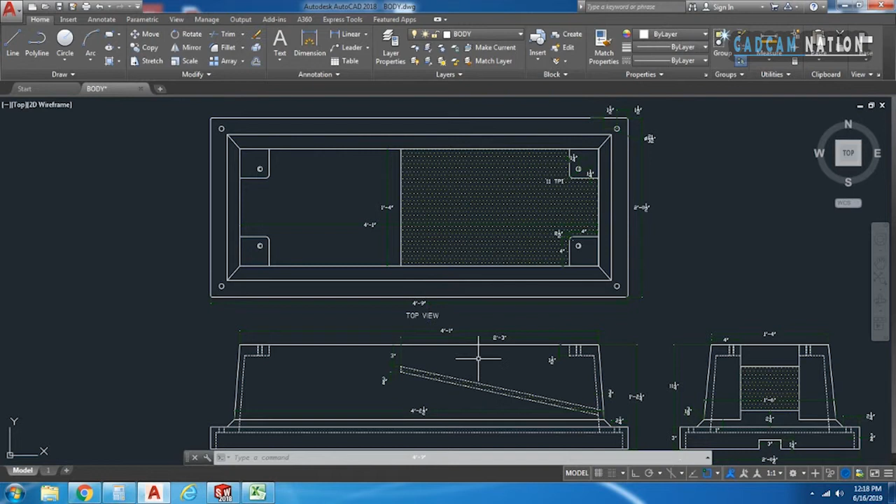So, the first thing that you need is the 2D AutoCAD drawing. As you can see here, I have an AutoCAD 2D drawing, 3 views of it, and all the dimensions are in inches.

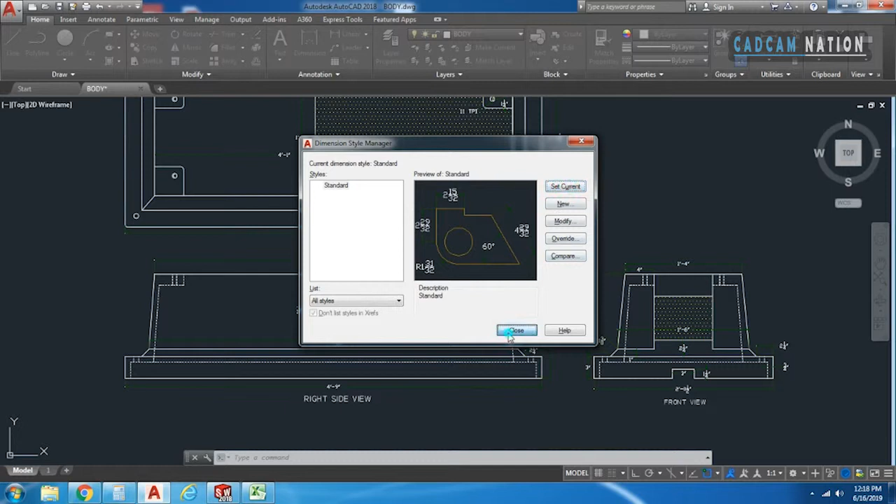I just want this drawing to be imported into SolidWorks, but I'm going to change the dimension style so it will be easier to compare in SolidWorks, because in SolidWorks it is not easy to view or visualize inches in a p/q fraction form. So this will be easier to understand the exact scale.

As you can see, I am using this format to draw the designs in my SolidWorks. You can change it anyways.

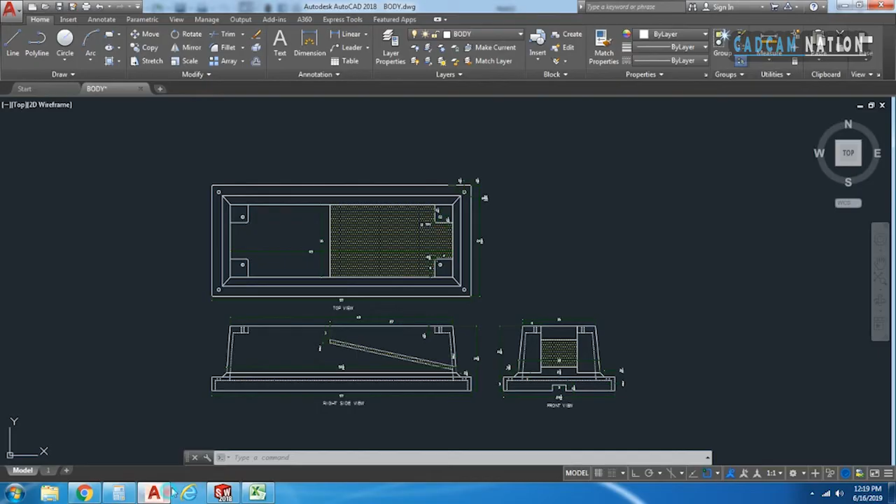In the AutoCAD format, as you can see, I have this AutoCAD 2D drawing, and I'm going to paste the link of this drawing so that you can follow the video along.

I have this AutoCAD drawing in a batch format and it will be very difficult to manage in SolidWorks. So what I'm going to do is copy this into another blank AutoCAD file. For doing this, it is also a very simple step.

Create a new drawing AutoCAD file like this and change its units to inches. This is very important because if you don't change its default settings...

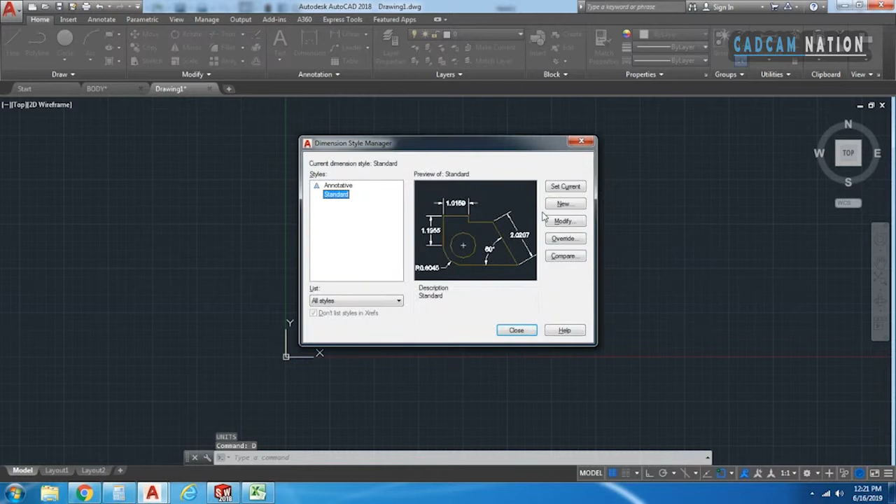...dimensions into the particular dimension which you already have in the previous drawing, so match the dimensions of the drawing with the blank one if you want to copy to the new file. If you don't do this, it will change the scale of the drawing, so you will not be able to import the file into SolidWorks properly.

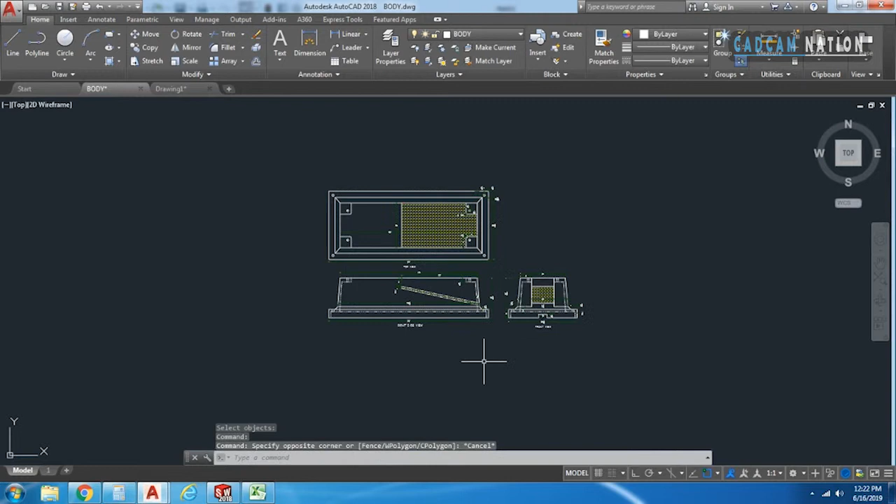So for copying this particular drawing from the batch AutoCAD file, I'm going to use the copy base command. This is a very basic command. Now select the first point which you want to drag around the surface, then select all of the drawing and hit enter.

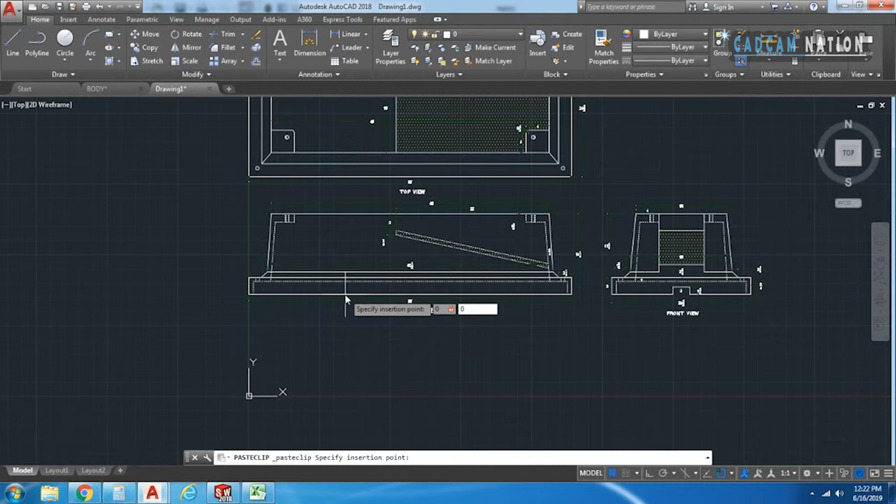Your drawing is copied. Now you have to paste it with Ctrl V. Enter the coordinate value to place the original copied object in its place, or you can simply click on the drawing area wherever you want to place it.

As you can see, all the dimensions are in inches here. So we are good to go.

Now I'm going to save this drawing in DXF format. If you are using the latest version of AutoCAD, you have to save the file in a lower version of the DXF file, name it whatever you want, and save it to a location where you can find your file easily.

So we are good to go to SolidWorks. Now we are on the SolidWorks window.

Now, as we already chose the new window, but this time I'm going to use the open command and search for the file where you saved it. I saved it on the desktop, so select the format you want to search for. This is the file we want to import into SolidWorks. Now select it and open it.

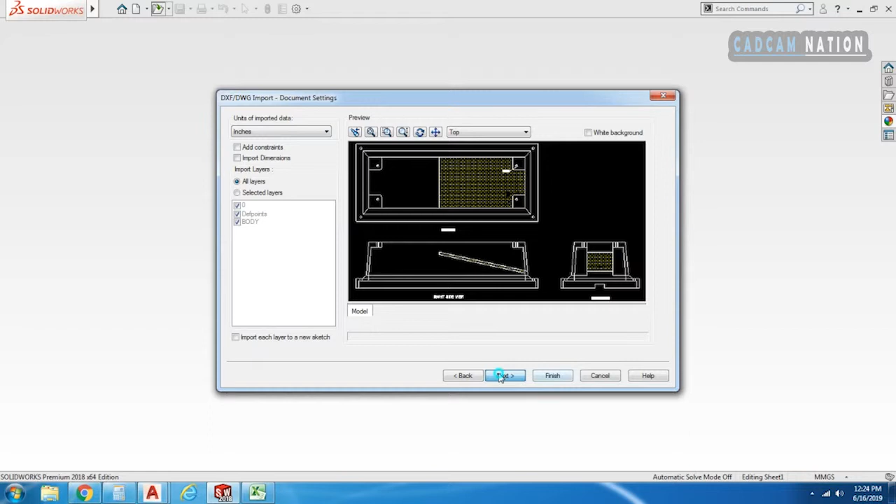So far so good. You can see your drawing is here, all the layers are here. You can even click on and off which layer you want to merge in. I'm just going to leave all the settings as they are and click on finish.

After processing, you can see the dimensions — the exact shape or scale of the sketch we imported from AutoCAD to SolidWorks is the same.

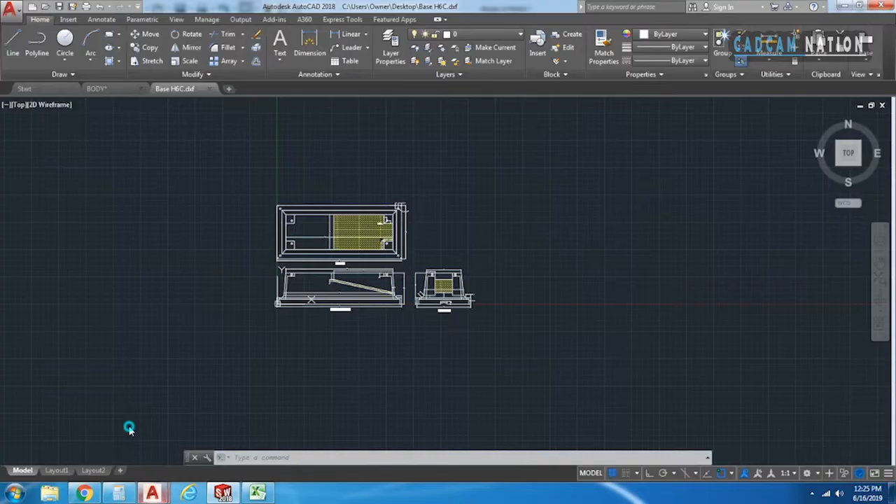You can see in the lower right corner 57 inches for the lower length. As I already showed you in AutoCAD, the bottom line is 57 inches. Let me show you once again — there it is, 57 inches. So that means the scale is good.

Now we have imported the drawing from AutoCAD to SolidWorks.

As you can see here, it is time to place these to their respective planes. You need this floating toolbar, 2D to 3D. Place it where it belongs.

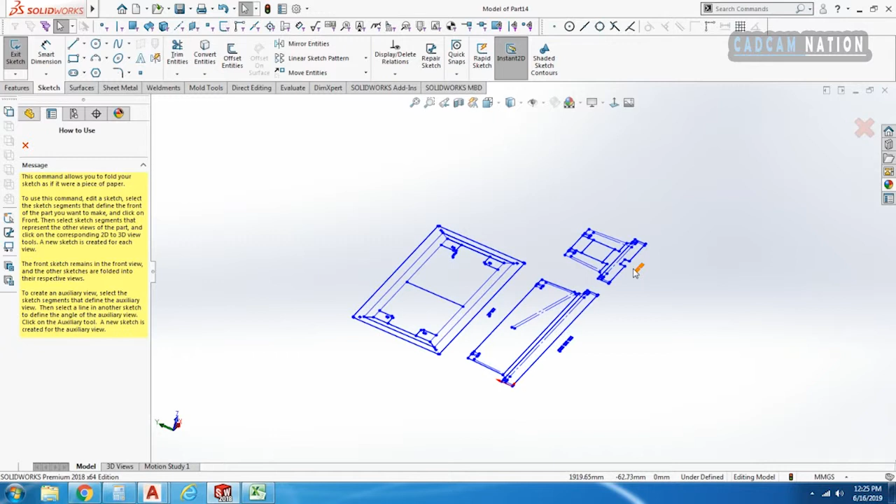Now I'm gonna add the front sketch on the front plane. This is the front sketch, and I want to place this on the front plane. Let me make it normal to view. Select the sketch and simply click on front. As you can see, it is grayed out, which means it is on the front plane.

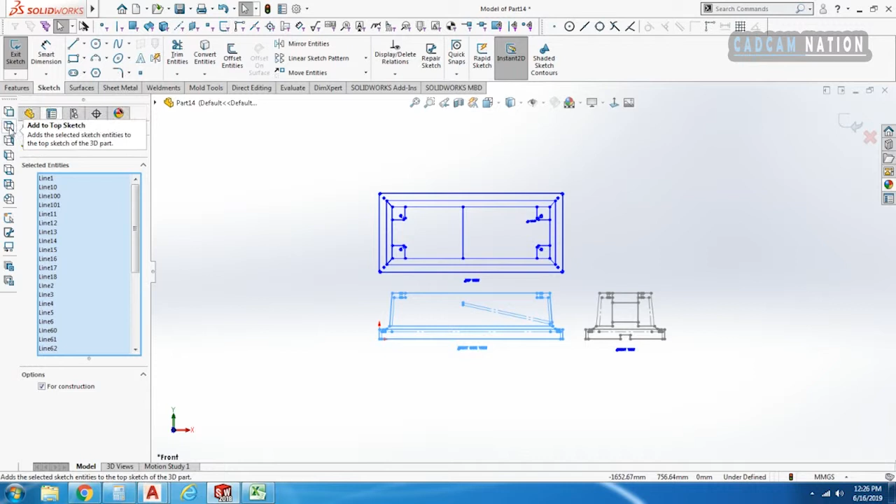Now do the same process for the right side plane. Select the sketch and select the right sketch. As you can see, it will automatically rotate to the right plane like this.

Now it is time to place the top view on the top sketch. Click on it, and it will automatically align to the top plane.

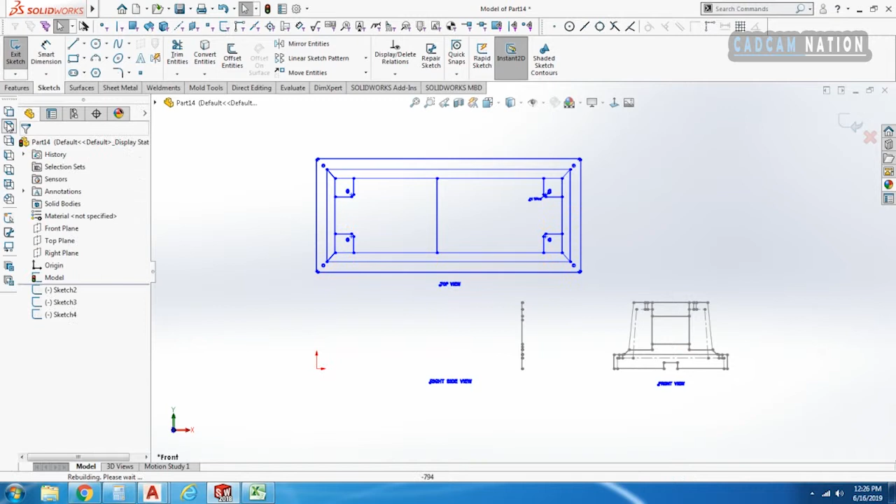As you can see here, we have assigned all the sketches to their respective planes, but also you can see it is not well aligned and we need to align it.

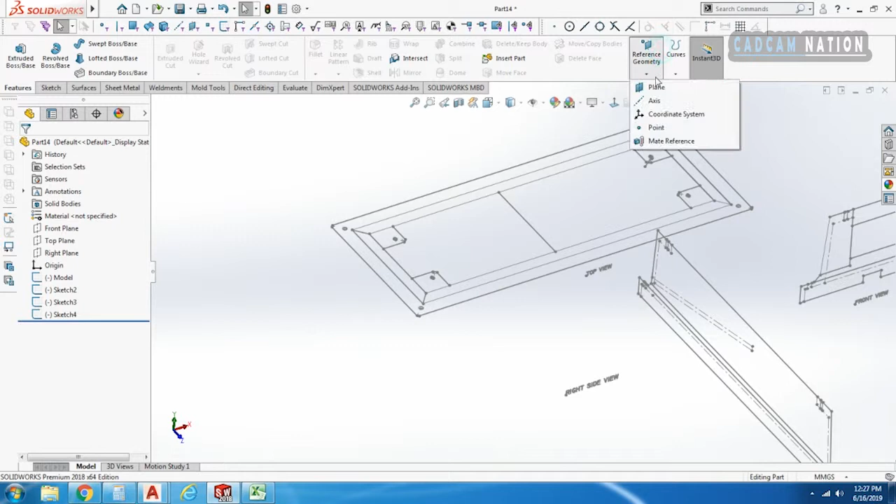As you can see, we have sketches over here. What I'm gonna do is create a plane from this point and make it like the front plane. So I have created the new plane coincident with this side of the top plane.

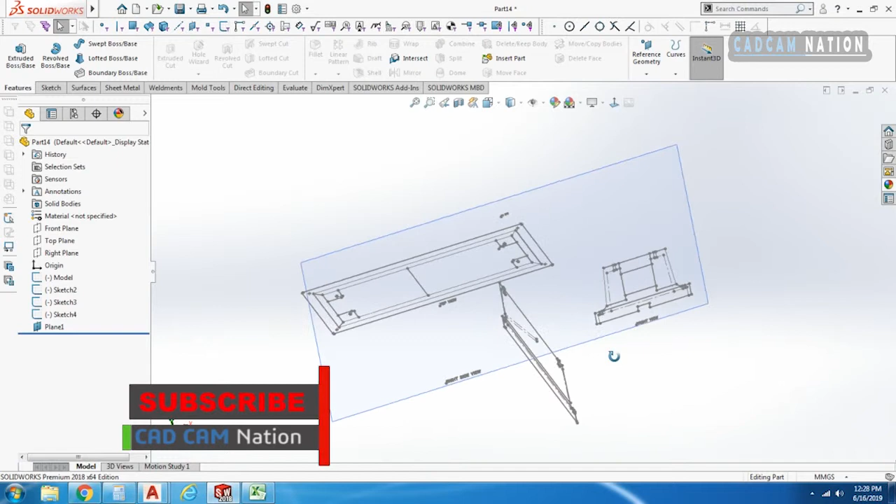Now I'm gonna create another plane on the front for the front sketch, where I'm gonna place the front sketch. To do this, again repeat the process: select the plane and select the point.

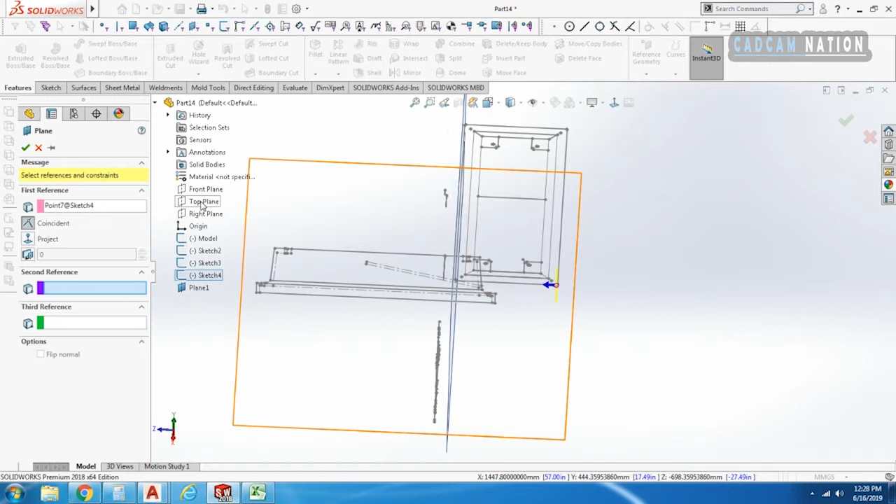Now select the top plane. Well, this is not the right plane we want to choose. I'm gonna make a perpendicular plane for the front instead, selecting the right sketch like this.

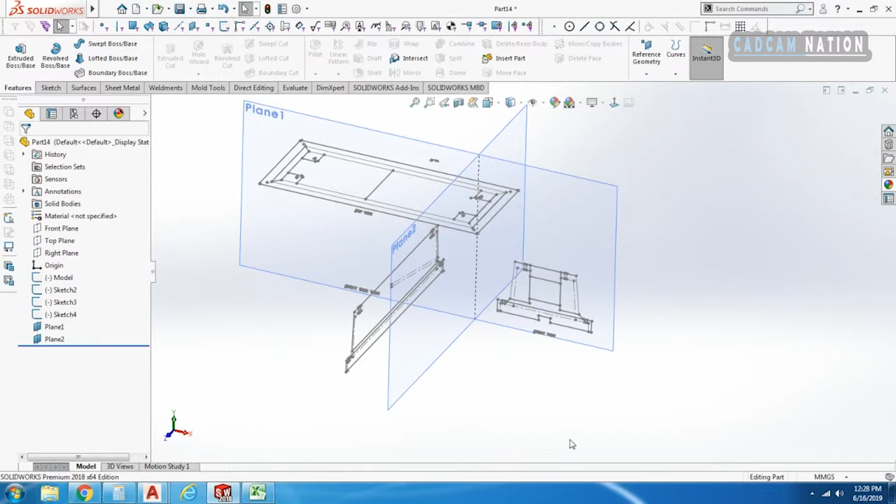This is perfect. Now what I'm gonna do is place this sketch. First I'm gonna drag this sketch to the bottom of the newly created planes so that it will be easy to place them on their respective planes.

I think we are not able to move the other sketch, so leave it as it is.

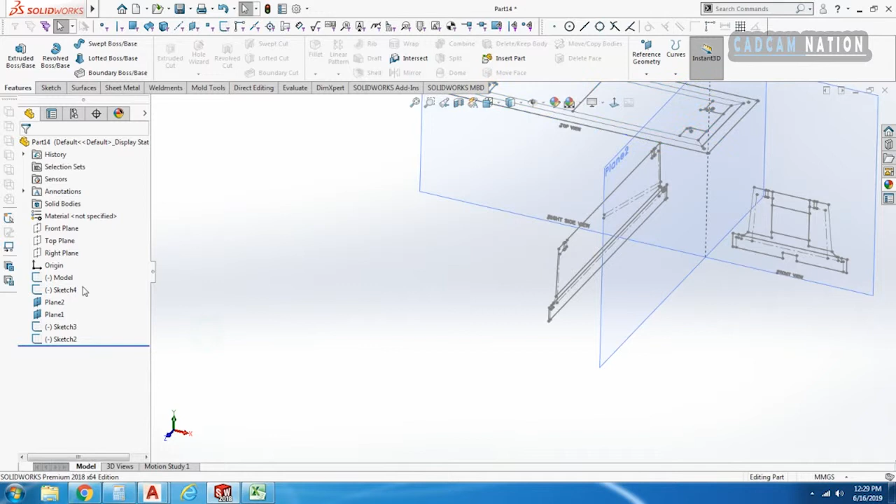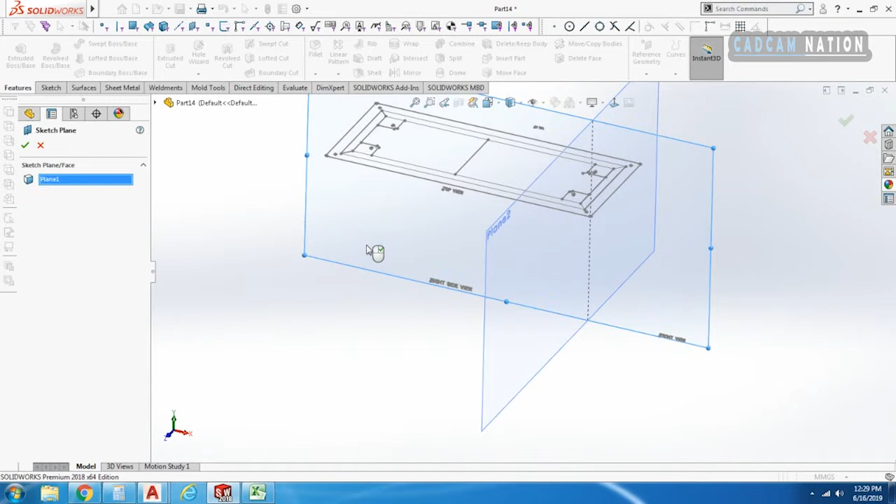Now select the front sketch and change its plane. Select the front plane and okay. Now you can see the sketch has shifted to the front plane which we created. Now select the right plane, which we have also created.

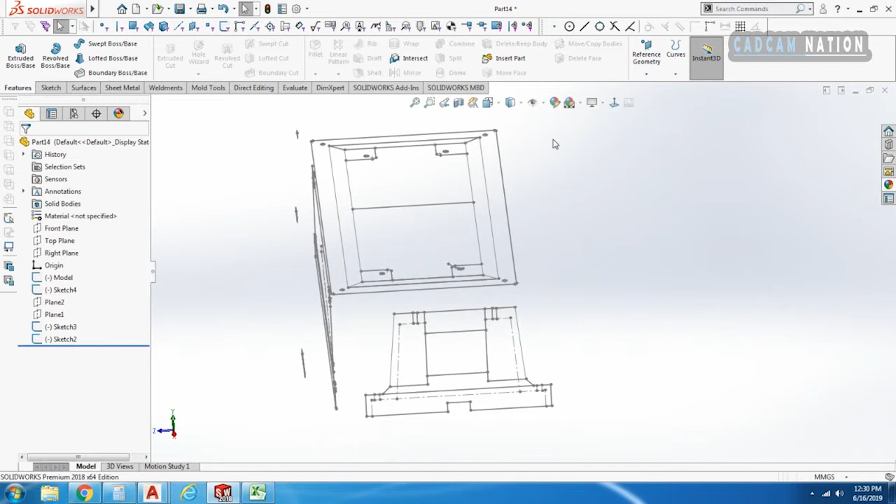As you can see, we have now aligned the sketches to their respective planes. But one more thing: it is still not aligned to the top and front views, which makes it very difficult if you want to generate a 3D object out of it.

So this is also very easy. Just select the offset of these corners, and as you can see, it is in the Z direction. The distance is something like this.

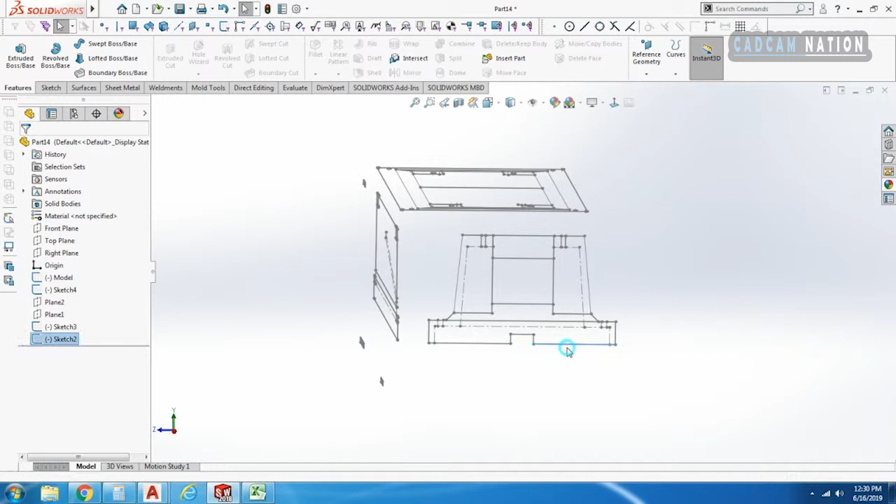Copy the distance. Now I'm gonna edit the sketch, making it normal. Select the sketch and I'm gonna move the sketch entities. This point is going to shift to the left.

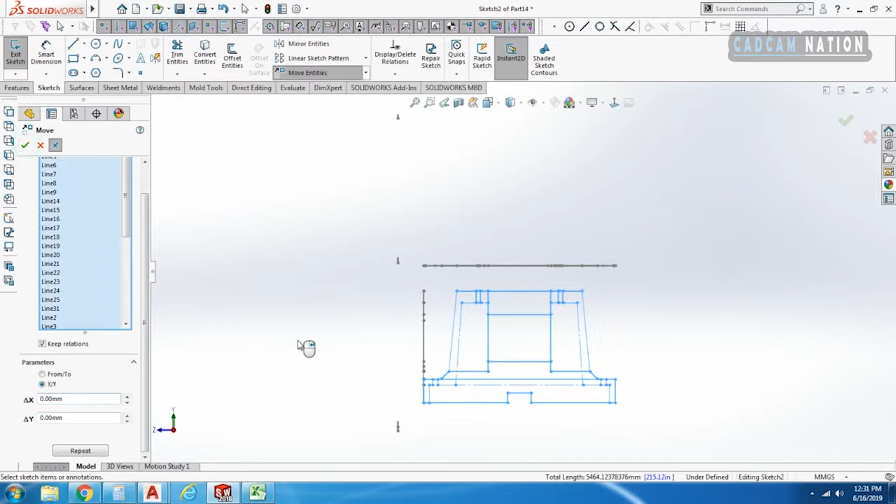So I'm gonna put this value into the X value. You can also try From/To, but it's very easy if you just simply Control V the value we have. Now if it's on the other side, just place the negative value, then it is all aligned with the top plane.

And exit the sketch. So now let's check it again. As you can see here, it is perfectly aligned. There is no Z value, which means it is perfectly aligned with the top plane.

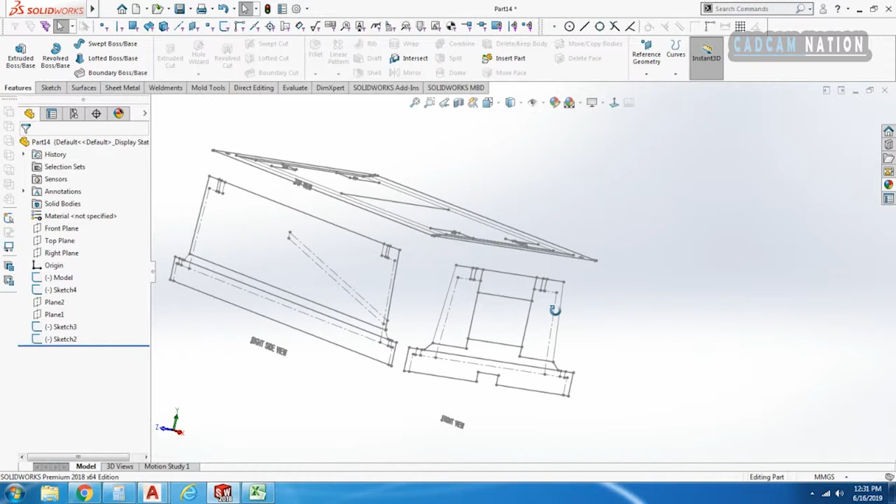Do the same process with the right side sketch. Measure how far it is from the top plane's edge. This time it is the X value we should measure, like here. I'm gonna copy the X value from this.

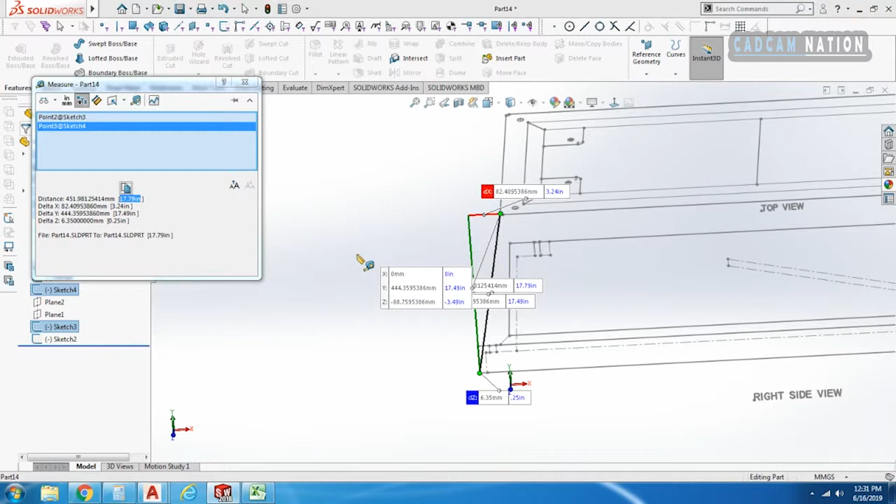Then again edit this sketch, select the sketch and move entities. So Control V and enter. Now you can see it is perfectly aligned with the top plane as well.

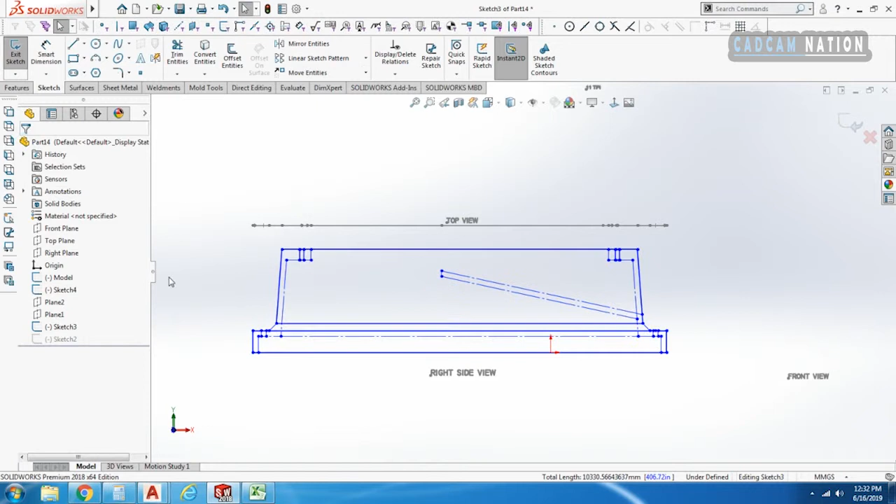So this is it, my friends. As you can see, we have successfully imported the AutoCAD drawing and aligned it in Solidworks.